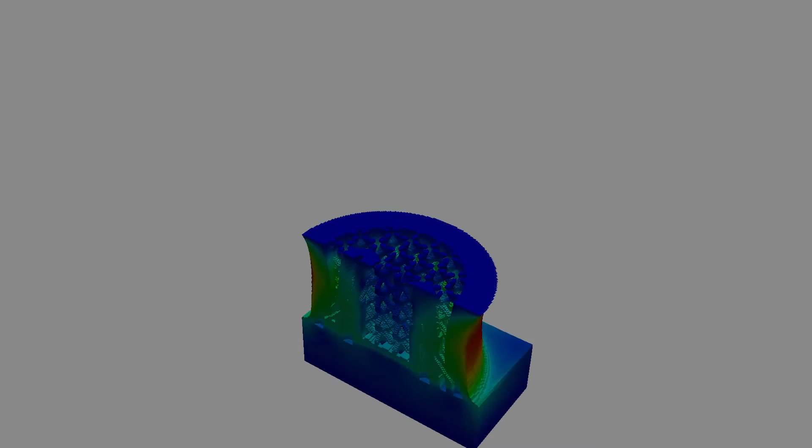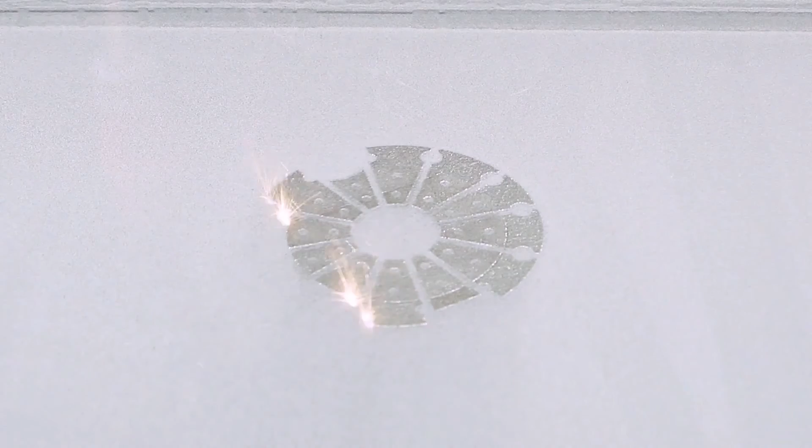The future of making things presents an exciting opportunity to serve customers in ways never thought possible before. All new technologies, materials, operating environments, ecosystems, and manufacturing processes will need to be considered.

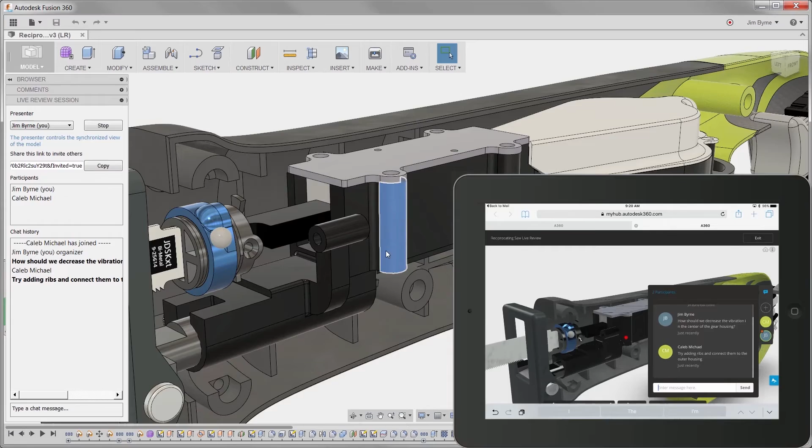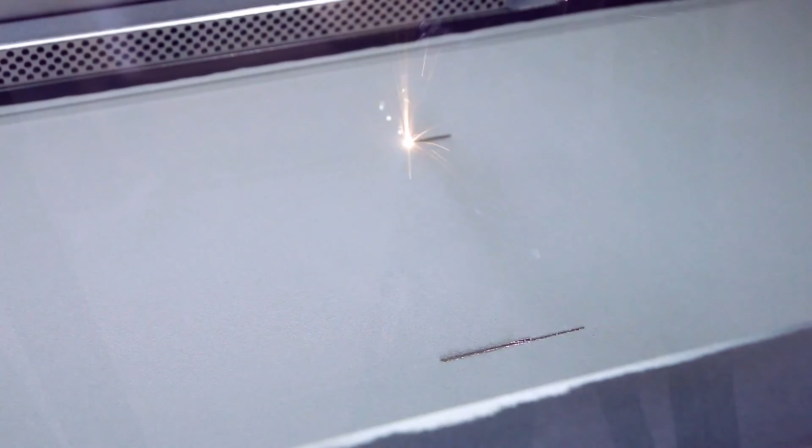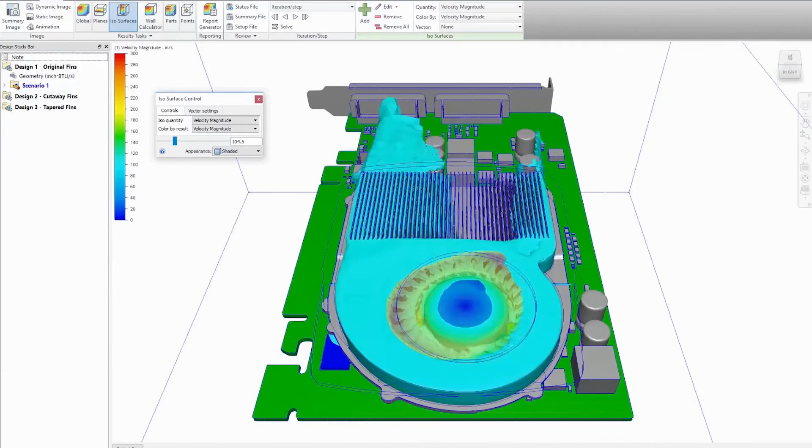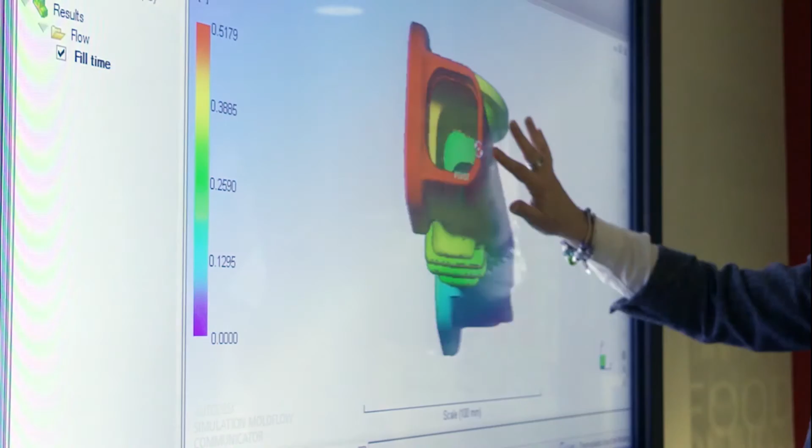An essential part of this change will be to enable companies to evaluate new ideas more quickly and flexibly than they do today, making the use of early and iterative simulation, whether from your desktop or the cloud, more crucial than ever. Our simulation products will improve molding, additive manufacturing processes, and overall product performance, resulting in increased innovation capacity and reduced warranty issues. By offering a proven technology with reliable and flexible offerings for designers, engineers, and analysts, Autodesk Simulation will allow you to embrace innovation and implement design processes to differentiate, predict, validate, and optimize product performance, and deliver cost-effective products to customers faster. With Autodesk's extensive portfolio of simulation products, the future of making things is now.

All right, perfect. Hopefully you all enjoyed that masterpiece of a video. Whoever was involved with that one did a great job.

What you saw there is a number of technologies, both new and old, that Autodesk is working on with respect to simulation for product design. So you still have your mechanical stress, your CFD, your plastic injection molding, but you're also seeing that we have a lot of additive and subtractive manufacturing simulation solutions coming your way as well. All of these things are going to be topics that we discuss today.

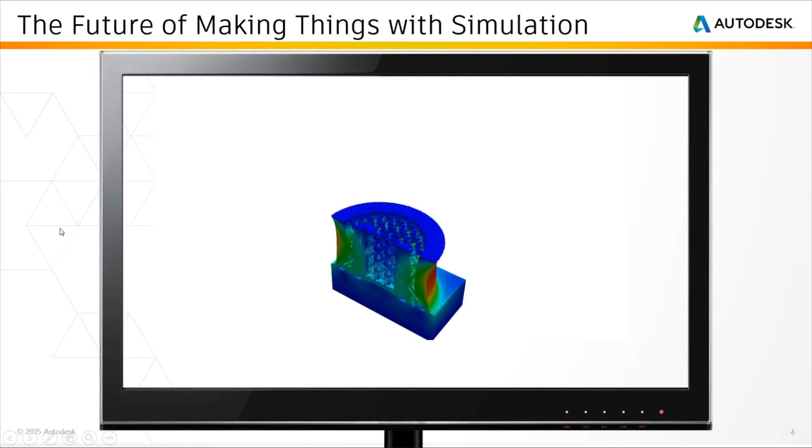This is all well and good, but we see and envision a bigger and better way for people to design products and get them to market. Traditionally, you have a concept, somebody's drawing their idea out on a napkin. They go ahead and design that in, say, Fusion or Inventor or some other CAD package, and then it goes off to production.

In the new world of the future of making things, we add a lot more to that. Instead of just drawing something out on a napkin, you're looking to make it more configurable, more personal for the person using it. Changing colors, making it larger, making it more powerful, all up front in the early concept and design phase.

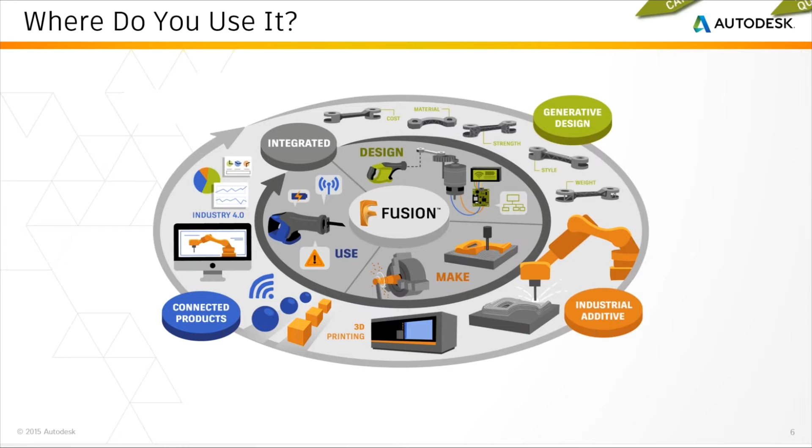So where do you use all of this? So, another really fancy slide here, but there are a number of places that we see that anybody who is making things in the future is going to need our help.

Improve product performance, win more bids, solving complex machining, improving your yield, enabling closed-loop designs, predictive maintenance. All of these things are things that you probably have to deal with on a daily basis when you're making a new design. And all of these fall into three categories that we're trying to line our software up with.

Design, make, and use. So if you're designing something, we have the tools for you. If you make it, maybe you're going to be using some of our CNC software. If you use it, maybe it's Fusion Connect that you're working with. All of these things play together nicely so that they help you out.

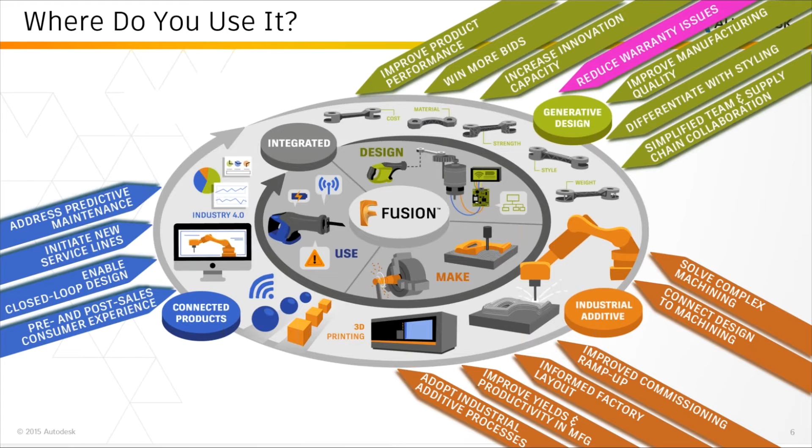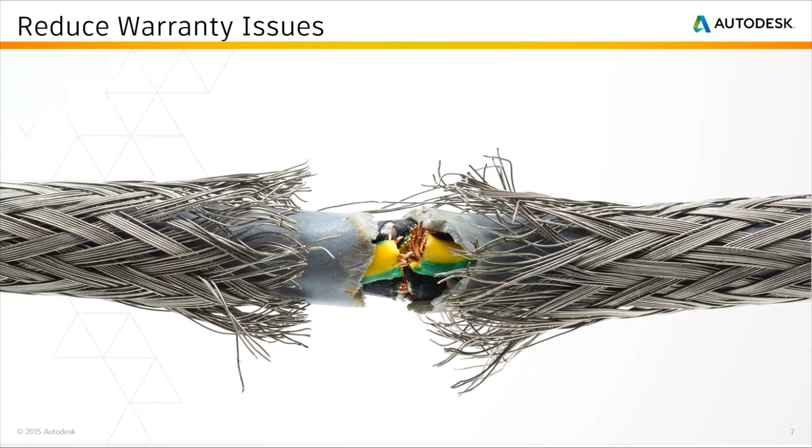With respect to simulation, though, one topic really is near and dear to my heart, and that's reducing warranty issues. This is a spot where simulation can really help out. And so there are a number of reasons that somebody might get a lot of warranty issues, and most of those are pretty easily avoidable with some upfront work.

So first, inadequate designs. I'll put these all up there for you to look at while I talk about them. Improper material selection, lack of testing, and specifying incorrect parts.

So let's talk about inadequate design. If you're just designing something in a vacuum in your CAD package, you probably create it and then send it off to be produced. Maybe there's some simulation in there, maybe not. But if you haven't done this, perhaps the walls of your part are too thin.

What if the part gets dropped and it cracks? What if there's too much vibration going on and you don't have enough life cycles, and your part fails due to fatigue? All of those things can be avoided with the use of simulation.

Improper material selection is a perfect case for simulation use, especially when we're using the cloud and being able to analyze nearly endless scenarios for your product. You could choose 50 materials, find the one that is least expensive for you that still fits any failure criteria, and have those all analyzed simultaneously, giving you the best option to save money, as well as for the end user to be satisfied with the product.

Lack of testing or data is another simulation solution, where right now maybe you aren't doing enough simulation and you don't know all the ways that the part might fail. You might not be looking at thermal loading, or you might not be looking at vibration. But with this simultaneous cloud analysis, it's easy to run all of these scenarios so that your part can avoid any unfortunate failures, we'll say.

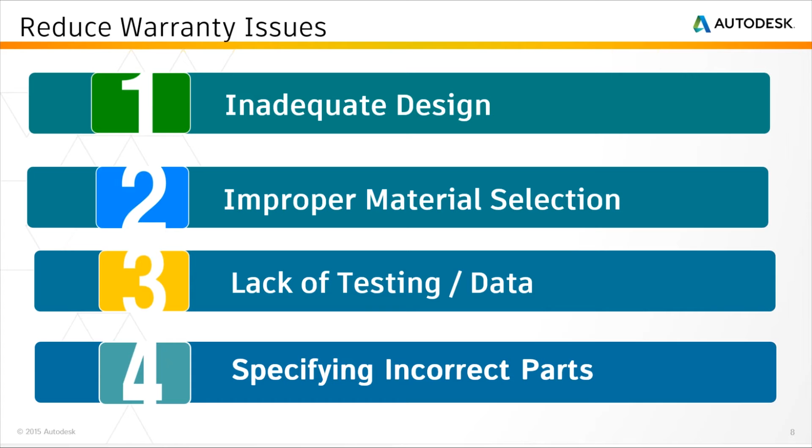Last, specifying incorrect parts. Don't really see how that factors into sim, but it certainly would be a warranty issue.

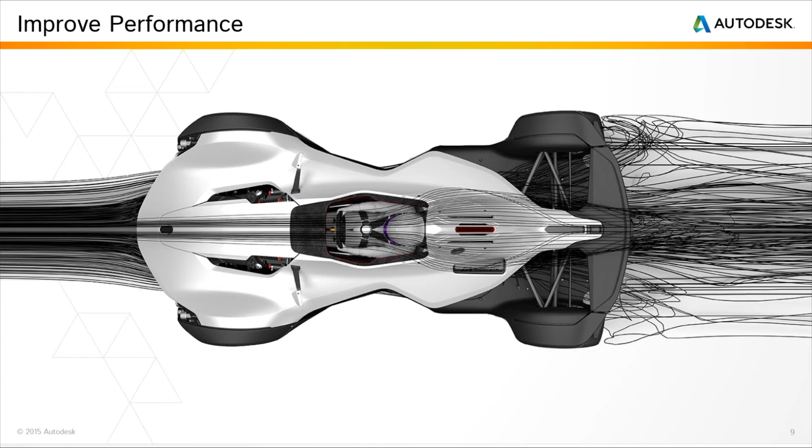Another big area that simulation helps out is improving product performance. And this can be done in any number of areas, but I'm going to point out three in particular.

First, electronics cooling. And as you can see in the image over to the right, we have a picture of the Ember 3D printer that Autodesk put together. One of the big concerns there is making sure that it's kept at the proper temperature. When you're heating stuff up to solidify it, obviously there's going to be high temperatures involved. There's a lot of fans placed in there, and there's a lot of design that goes into that.

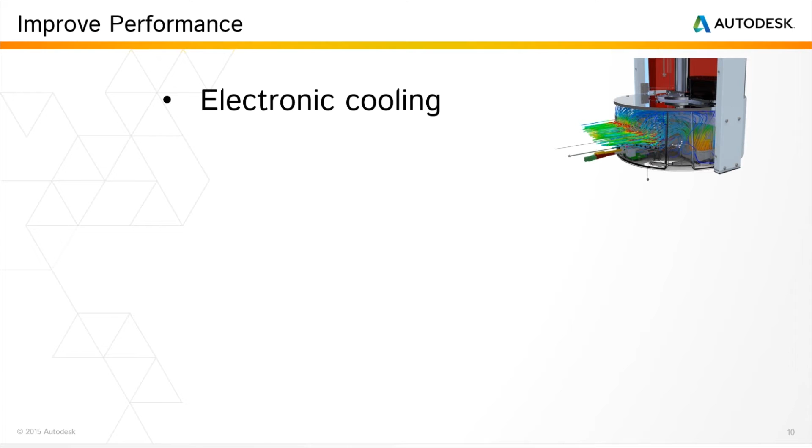My favorite example of where electronics cooling probably should have been investigated a little bit more is in the Xbox. Does anybody remember the red ring of death? I know that I do because I had that happen. Unfortunately, I think that there was a little bit of miscalculation in the amount of cooling going on in the Xbox, and it led to a little bit of overheating. So maybe Microsoft should buy a few more seats of CFD.

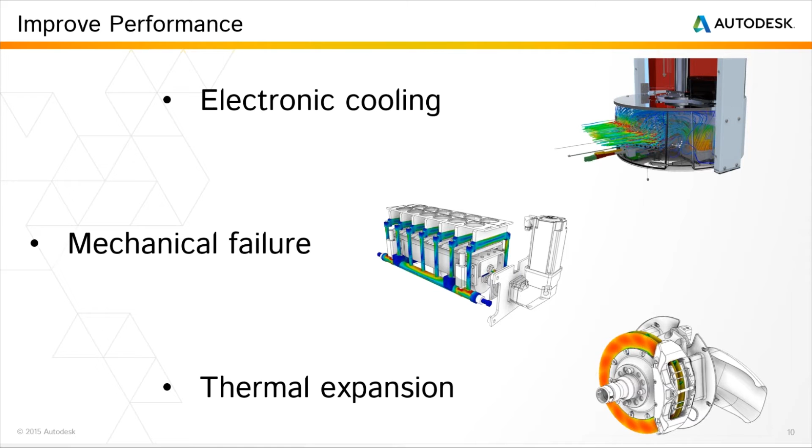Another example is thermal expansion. So if parts are moving, they tend to get hot. If parts are moving and touching something else, like brakes or anything of that sort, they're going to get even hotter. When things get hot, they tend to expand. And when they expand, they can unfortunately touch other parts of the design that they weren't intended to be in contact with. If that happens, you can see wearing, you can see warping, all sorts of problems that might not be thought of when the part's being designed. If you're using simulation early in your design cycle, though, you can make sure that you account for that sort of expansion so that your parts aren't coming in contact with each other.

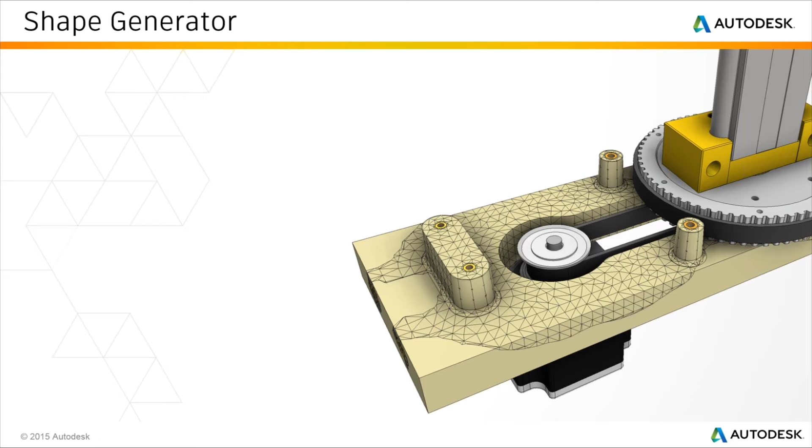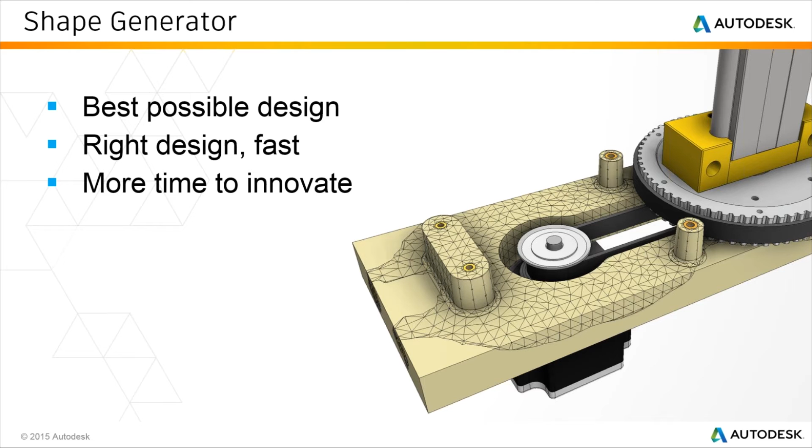So that's kind of interesting innovation, but something that I think is a little closer to what we're looking for would be something like shape generator. So inside of Autodesk Inventor, we have this cool new technology called shape generator, which is going to give you the best possible design, do it quickly, and give you more time to innovate on your creation. So if you don't know how this works, there are tons of videos on it, but it is really cool technology.

So all this is great, but what's it actually doing? We're setting this up so that, let's say our part weighs 100 grams, and we want it to be reduced down to 50 grams. We can check that. Check these boxes to say that we want to reduce the mass by 50% and tell it which regions we want to preserve, and then it will iterate through and give us the best possible design to make that happen.

Even better, we can then use simulation to verify that if we have loads of such and such an amount of weight, it's still going to be able to withstand and last the amount of time that we want. So not only are we providing a lighter part, we're going to be using less material, and we're going to still have the safest parts available.

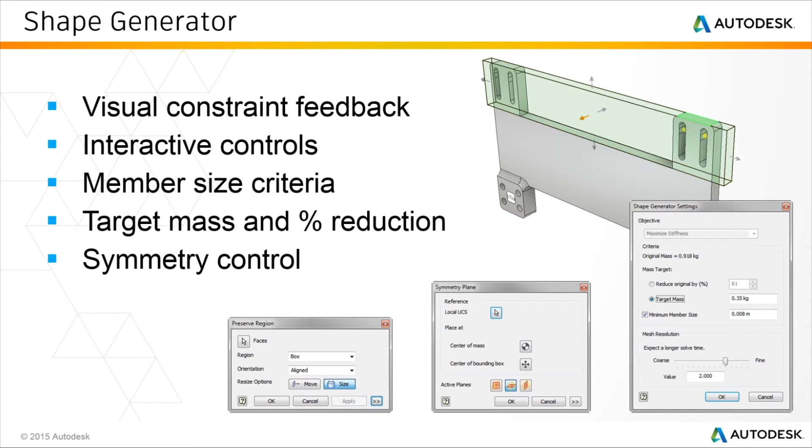So some people that have seen this in the past probably have seen examples by someone like Airbus, who has been using really cool generative design to come up with shapes to provide very strong designs which never would have been thought of by humans. In fact, we probably wouldn't be able to create a lot of what they're working with these days. So next time you're up in the air, you can feel safe that, you know, the plane's lighter, but it's still just as strong.

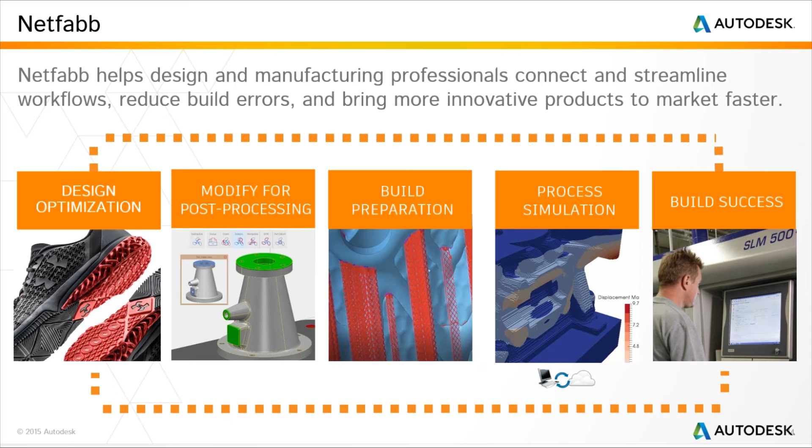Another cool new simulation-esque technology here at Autodesk is Netfabb. Netfabb is for designers and manufacturing professionals to do all sorts of cool things: optimize your design, modify and prepare your geometry, process simulation. All of this is a lot of fun, fancy buzzwords, but really this is for simulating and getting the best and most accurate additive and subtractive manufacturing possible.

All these are cool, but my personal favorite is the hybrid additive subtractive workflows. I have a 3D printer sitting on the desk at my house, and I can do a lot of cool stuff with it. I can 3D print some Yoda heads, and I can 3D print toys. I could 3D print little things that break around the house and replace those, but it's not really super useful to have a 3D printer at home yet.

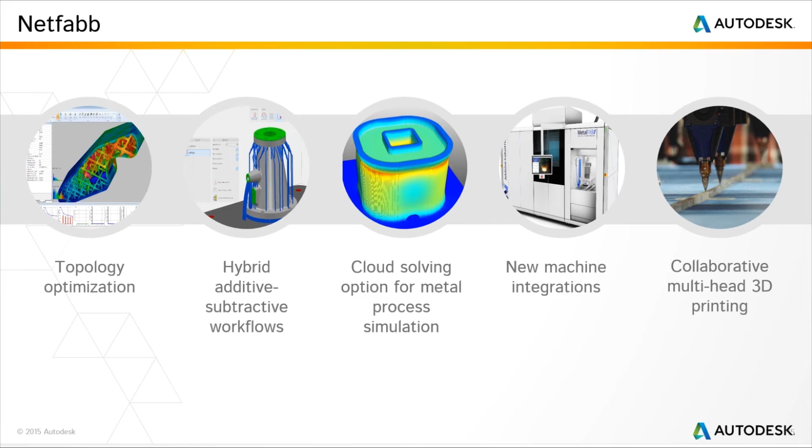But if we're able to take additive manufacturing like 3D printing and combine that with subtractive manufacturing like running a CNC machine, and optimize the workflow between the two, I think we're really going to come up with some cool new designs that we wouldn't have had in the past.

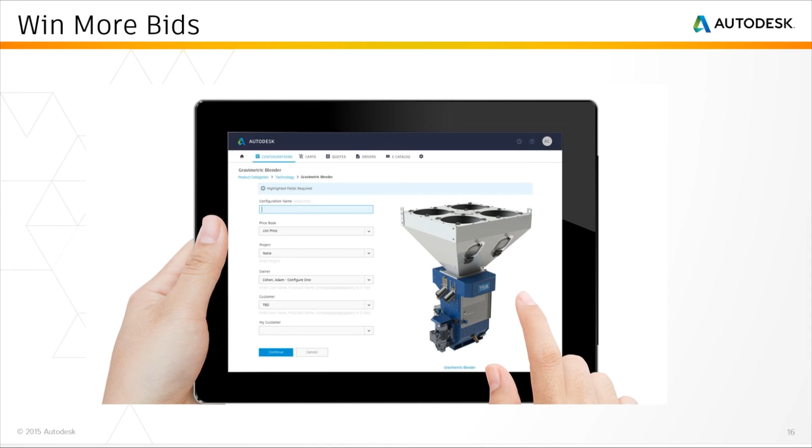And the last thing we want to talk about is winning more bids for you with simulation. Now, I don't really know what holding an iPad has to do with winning more bids for you, but I'm confident that it does. What I do know helps you is knowing the difference between optimization and validation.

But if you're optimizing your design, you're using simulation earlier in the design cycle, and that's going to save you in the long run. A lot of people say they don't have the resources available to make this happen, or that they don't have a finalized design, so why should they be analyzing it?

Well, as you analyze it earlier, it means there's going to be less change between the prototyping and manufacturing stage and the engineering time. You know what's going to fail in your part, you're already accounting for that, and even at the design level, you're able to do some basic analyses to make sure simple changes won't have to be made further down the road.

This often reduces the number of physical prototypes that need to be created, as well as the amount of time an analyst has to spend looking at the model. So we're always encouraging you to optimize your design by using simulation early and often.

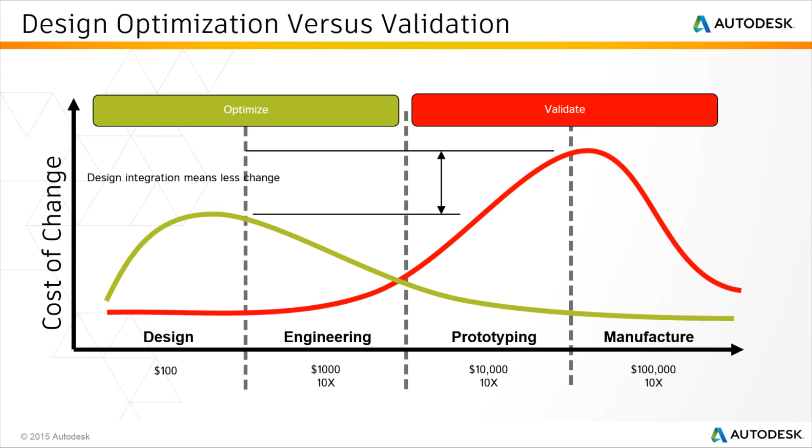Now, as an Autodesk employee, I'm not allowed to give a presentation without mentioning Fusion 360. Many of you may have seen Fusion 360 now offers a wide variety of simulation solutions, based on the Nastran solver, allowing for static stress, modal, and thermal stress, all of which they used to have, but it's now also offering structural buckling, shape optimization, similar to the shape generator we talked about before, nonlinear static, and even event simulation.

So all sorts of great technology being added there, but I believe you'll probably have other webinars discussing that in more detail in the future.

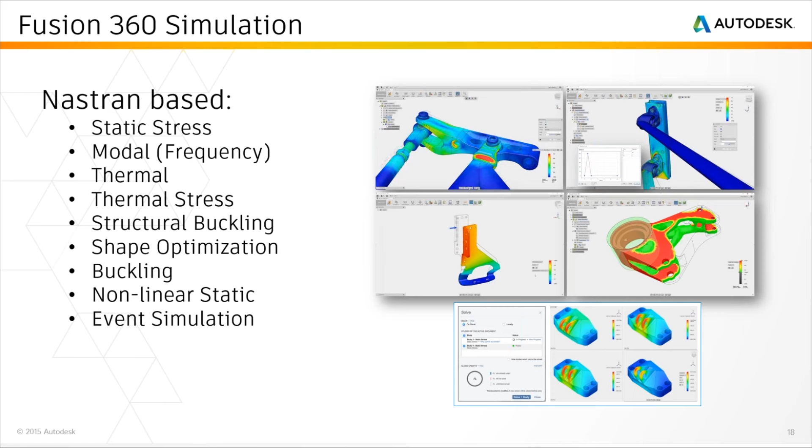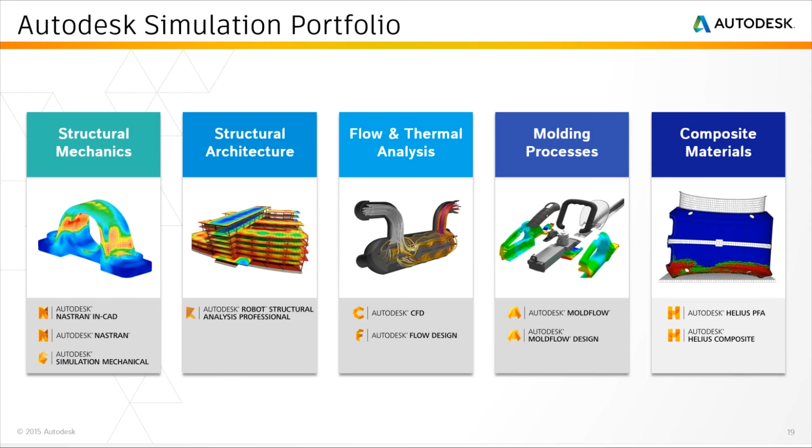Getting back to what we were talking about, that's the Autodesk Simulation portfolio. Anything from structural mechanics to architectural design, fluid flow and heat transfer, to even the molding process and using advanced materials like composites, Autodesk has a solution to handle that. This solution is purpose-built, flexible, and integrated.

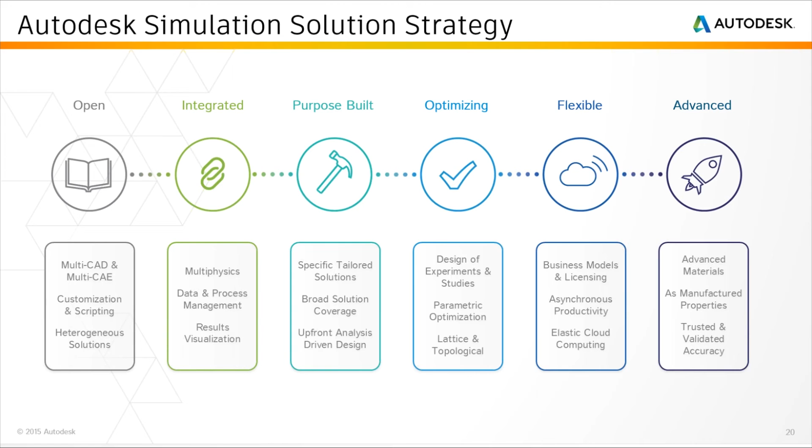So no matter if you're using Inventor or Fusion, SolidWorks, or Pro-E if people still use that, or whatever people might be using, we're able to take that geometry, drop it into our simulation products, and give you the optimized solution earlier in your design cycle to save you time and money.